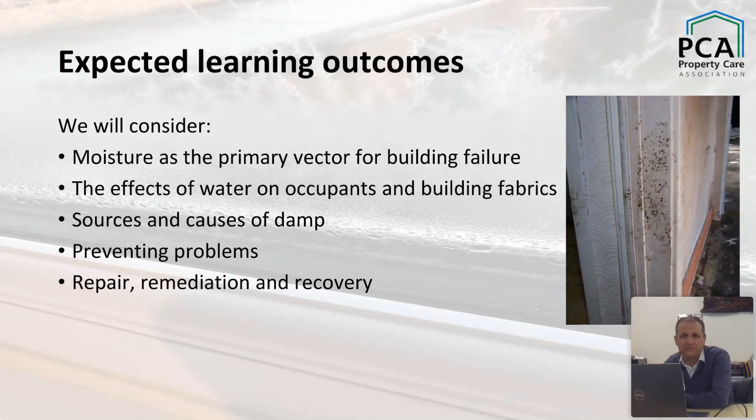We'll think about sources of moisture, preventing problems, and we'll look incredibly quickly at repair, remediation, and recovery. But we're not going to tell you how to do it, we're going to cover some of the very basic principles. So for those people who know something about dampness, the only thing that's in this presentation for you is a big lump of my photo library. I think there's some quite interesting pictures that keep you engaged, even if the content is quite simple.

So how do buildings fail? They fall down because the foundations aren't good enough. And that's something that has afflicted buildings since the day we started putting one brick or one piece of wood on top of another. We're not looking at that today.

Buildings get hit by things, whether that's the wind, the rain, impacts. We bash them, knock them, bump holes in them, and they fall down. But actually, the common thread with an awful lot of building failures, the vast majority, is the effects of water and the effects of free water, liquid water moving around. So that's what we're going to focus on.

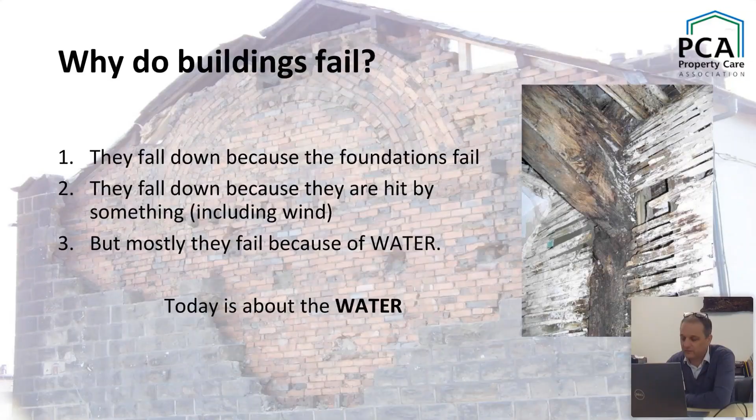So before we get into things, it's worthwhile thinking about what water facilitates, what water can lead to. It provides a mechanism where plants and animals can use building materials for food. Let's take wood for example. It's a great example. In its dry state, a piece of wood can last for an indefinite amount of time.

There's pieces of wood in service or kicking about right now that are many hundreds of years old, if not over 1,000 years old, that still work. It hasn't been eaten by anything, and it still has its structural integrity. Now that could be lost in a moment if that timber starts to get wet.

And as it gets wet, the animals and plants that can use the materials in that starchy material, in that starchy piece of timber, can start to move in and degrade it, biodegrade it, eat it. So that whole process of plants and animals living on building materials is quite important.

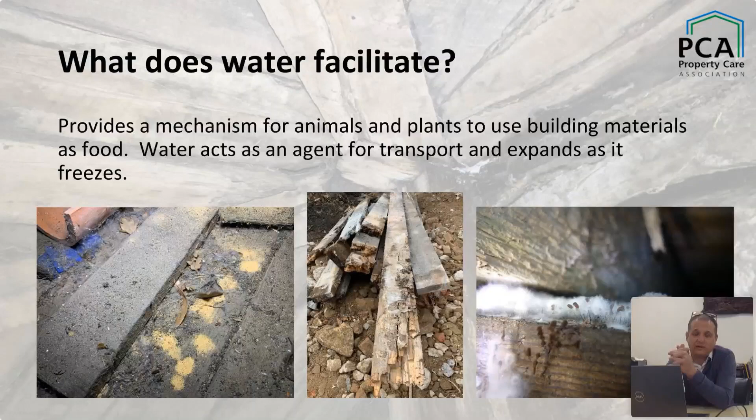But water also acts as a transport mechanism, and it also, unfortunately, has this horrible habit of when it freezes, it expands, and that breaks things down. So the bugs and fungus that find a way in and are early colonizers for damp construction materials are things like mites, molds, insects, beetles and fungi. We see those commonly all over the place. Some of them are inconsequential, but actually quite a lot of them, particularly when they're in our homes, do have consequences.

So the other thing we talked about is water being a mechanism for transportation. One of the things water does do when it's at any volume in construction materials or anything for that matter is it moves about. It wants to go from its source and diffuse through the construction materials. Anything that's porous, anything that has the ability for that to happen, it will move.

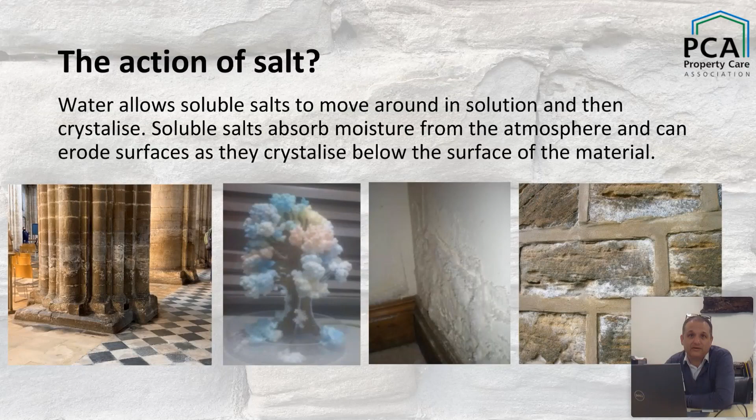What else does water facilitate? It corrodes stuff.

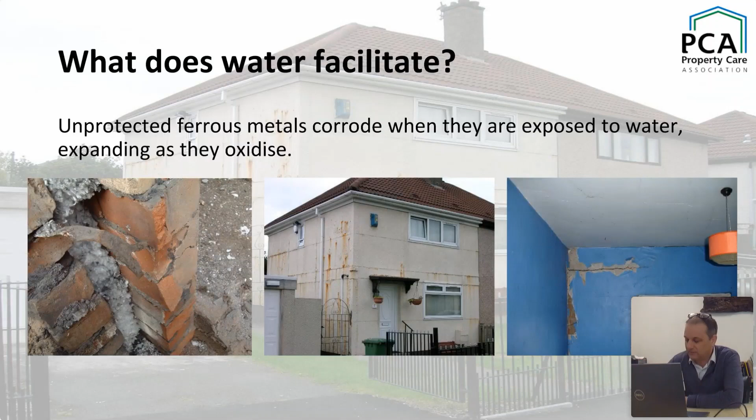We also mentioned very quickly that water freezes. Water is one of the only materials, as far as I'm aware, that as it turns from a liquid to a solid, it expands rather than contracts. That process can be incredibly damaging, both on a micro and a macro scale. Even smaller ice crystals that form in porous materials can blow the face off bricks. It can slowly start to erode or accelerate erosion. But it also does things like pull bridges apart and causes pipes to burst, and all that kind of stuff.

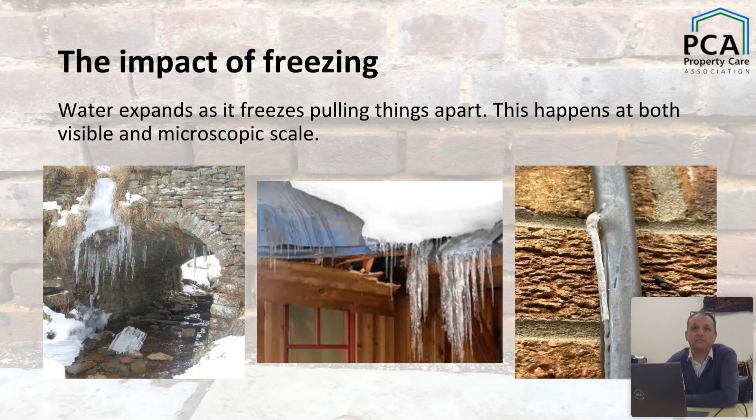So what does water damage look like? We're probably all familiar with the effects of water in construction materials. We have collapses, denaturing, swelling, warping, and delamination of materials. That's often caused where you have things like timber particle fibre boards that are in their dry state nice and solid, but if they get wet, they swell.

And once they've swollen, the materials that make it up have absorbed some water. It breaks the bonds between the elements that are glued together or held together. And when it dries, it doesn't go back. So those glue bonds, those bonds that are created in the manufacture, are broken. That's the same with things like plasterboards that just get wet and dry out - they generally don't go back to their original state. Laminates, chipboards, those sorts of things. There isn't necessarily any fungal action there. It's just the fact that the cells have absorbed water, swollen, broken the bonds, and it doesn't go back.

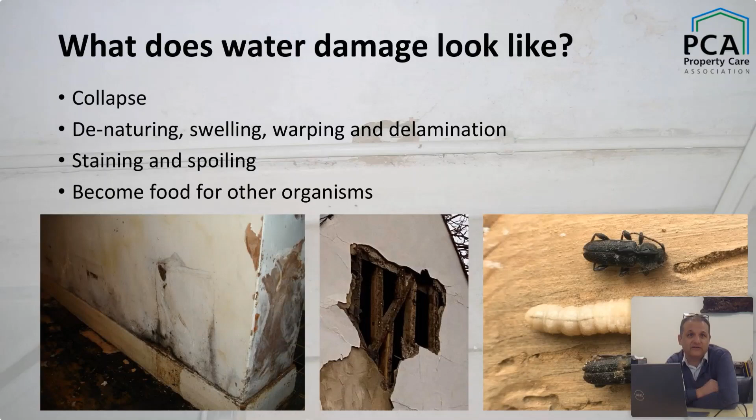You also get staining and spoiling, and that's part of that water movement, where it's dragging contamination and muck from wherever the source is through the materials and then depositing it on the surface. It can be quite difficult and tricky to deal with - you need to know what you're doing. And again, we have wood and other materials that become food for other organisms.

So where does the water come from? We're not going to look too hard at the whole range of things. We're going to stick with three main threads, if you like: groundwater, water penetration, and atmospheric moisture that leads to mould and condensation. Let's look at groundwater first - rising damp, penetrating damp below ground. It's where water rises through capillary action or moves horizontally and vertically as a result of hydrostatic pressure. It's very, very common.

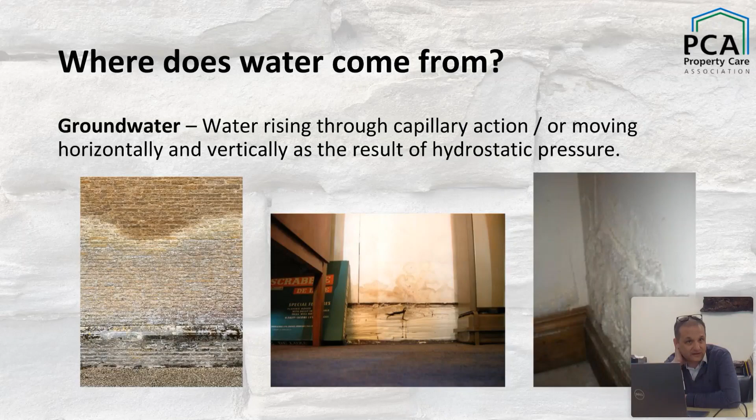So where does the water come from? When we're talking about rainwater, well, it comes from rain, and that's why I like to call it rainwater penetration and not penetrating damp or anything else when it's above ground, because it signals that it's come from the sky. The thing with rainwater penetration is it generally starts at the top of a structure where it gets in, and it works its way down.

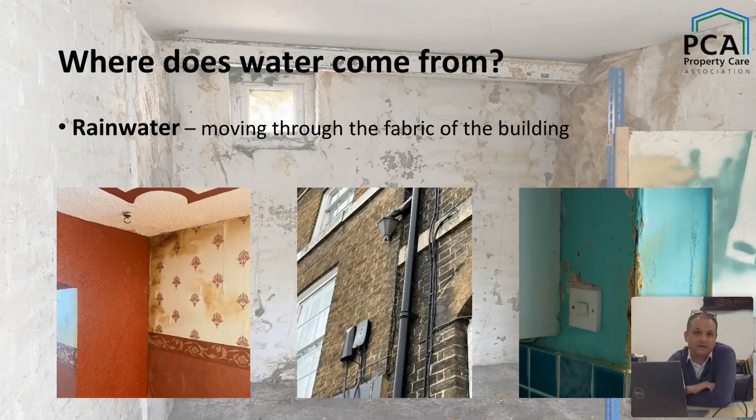If you think about how you might drop water into the centre of a sponge, you may well have a small point at the top where the water's being applied to that sponge, but by the time you get to the bottom of it, it goes down through the material like a cone. So often you'll find that relatively minor defects at high level will naturally lead to quite sizable amounts of moisture further down.

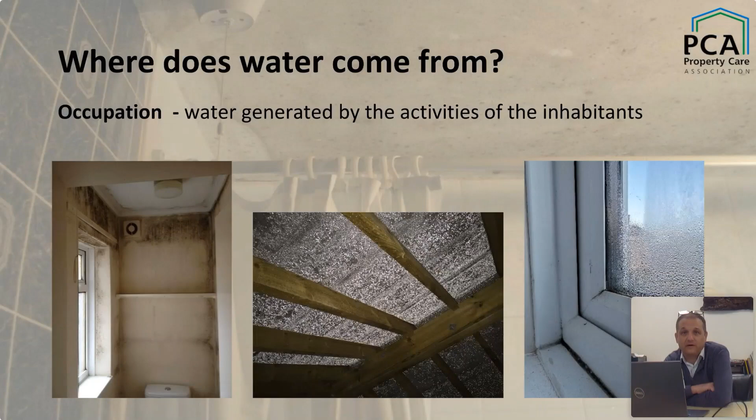Occupation. So condensation, moisture, if you like, moisture that leads to mould, and internal moisture imbalances - it is generally water generated by the activities of habitation. So it's the stuff that we do, and again we'll look at these things in slightly more detail in a minute.

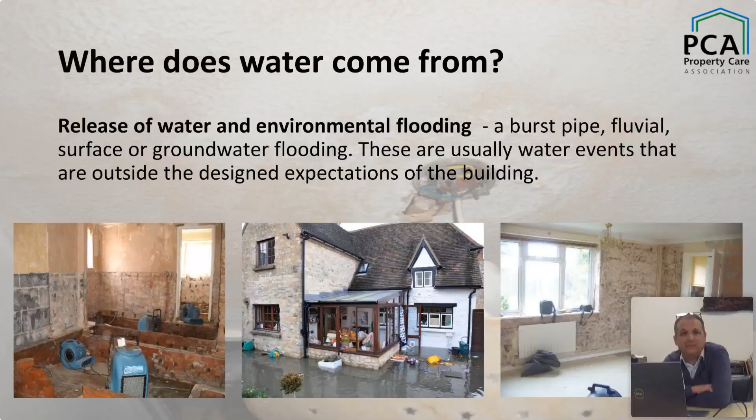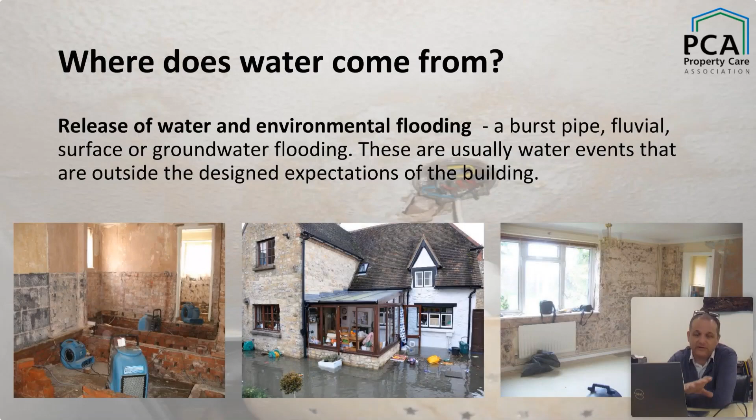I've also put in a slide about flooding. Flooding kind of sits aside from all of this, but you can think about it not just as fluvial river flooding or groundwater flooding, but actually in respect of releases of water from burst pipes and all that sort of stuff. But these are usually events that are outside the design expectations of a building. They're calamitous things, and they're dealt with probably slightly differently. However, the basic principles of recovery - drying out, understanding causes, redesign, etc. - stand scrutiny.

So let's think about groundwater and how and why that happens. To get groundwater to come up or through a wall, the soil conditions have to be such that water can be held there. You have to have precipitation, water coming into the ground from somewhere, or water from drainage or something else that's failing. But you have to have a loading of water in the ground. You also need a substrate - a wall or a floor or whatever it might be - that is susceptible to that. And let's be honest, most masonry structures are.

One of the ways that we can design against that is to build materials that don't have the ability to transfer water through them or up them. But actually, let's be honest, most construction materials that we've been using for the last few hundred years have a degree of porosity, and will allow water either to rise through them or be transported through them.

The other thing we can say is that both the height, when you're looking at rising damp, and the rate of movement into occupied spaces is dependent on the rate of evaporation. So if you have water evaporating at the base of a wall faster than it can rise, or you have sufficient height in the wall to prevent it continuing up, and your evaporation characteristics are correct, then that can have a significant effect on the height of rise or the rate of movement. The point being, though, that this is seasonal too, so it changes winter and summer.

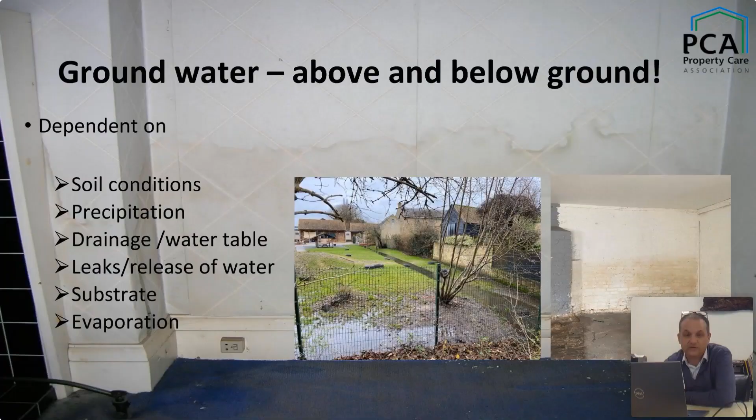So how do we control groundwater? In the simplest of terms, we either do nothing, because sometimes you don't need to - if building materials are not susceptible to groundwater rise, or you have no need to use or protect that space from water, there's nothing vulnerable, you can leave it alone. Another way, and a perfectly legitimate way of managing it, is to reduce the water in the soil, through drainage, or by moving the water away for some reason, or covering the ground. There are a number of ways to do it.

It can be incredibly expensive to try and do that in a retrospective way, and it also needs a lot of maintenance. The other way to control groundwater is to block it, and there's a whole world of ways in which we control water, either penetration or rise, through blocking it.

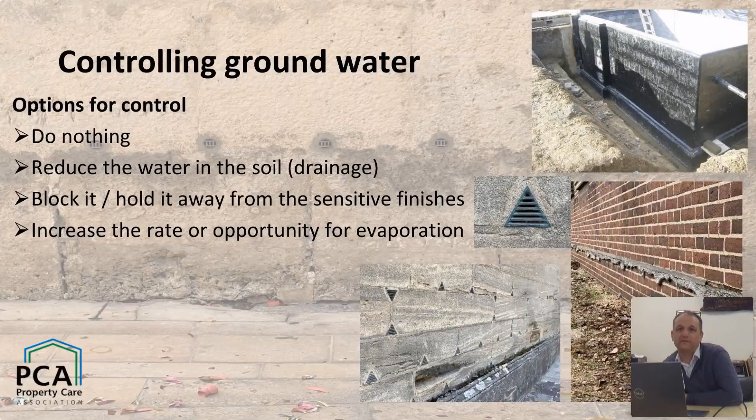But the other photographs are probably another way that is used to try and control water. I don't have very much truck with it, but that's a form of siphon system. That photograph was taken in France - they are brass fittings stuck in triangular holes in an attempt to try and increase the rate of evaporation and keep the building dry. I don't have very much truck with those sorts of systems - they don't kind of work for very long. However, they have been very popular in Europe, and there are outlets in the UK, of course. But yeah, not one for me, I'm afraid.

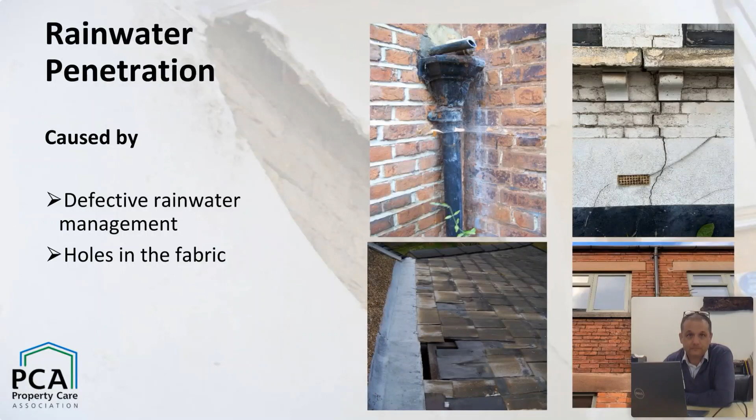We've also got issues with porosity. Building materials that have high rates of porosity, so they can take on water very readily, usually rely on high rates of evaporation to be able to work in balance, so they don't wet down. However, in some circumstances, materials are too porous and their moisture exposure is too great, and you get an imbalance.

Water gets into the structure in greater volumes than can evaporate out during periods of drying. This can be affected by coatings, changes of exposure, and cavity wall insulation. All sorts of interventions can tip a balance. So porosity is something that's really important to think about if you've got water penetration problems. Things like through stones and solid walls can encourage it, and poor design. The photographs on the right-hand side, yes, they are holes in the building or rainwater issues, but they are inherently bad design and prone to failure.

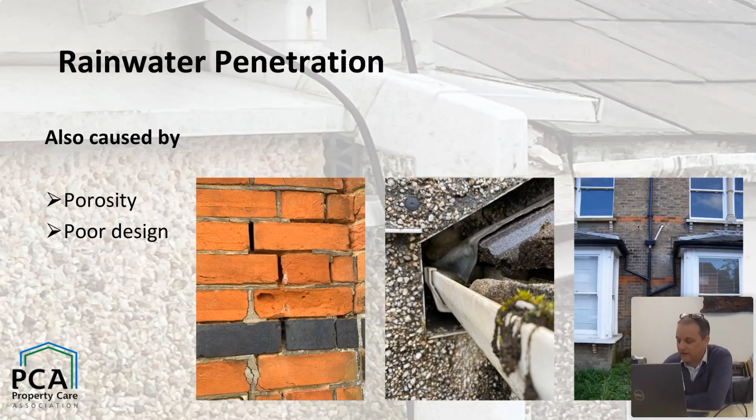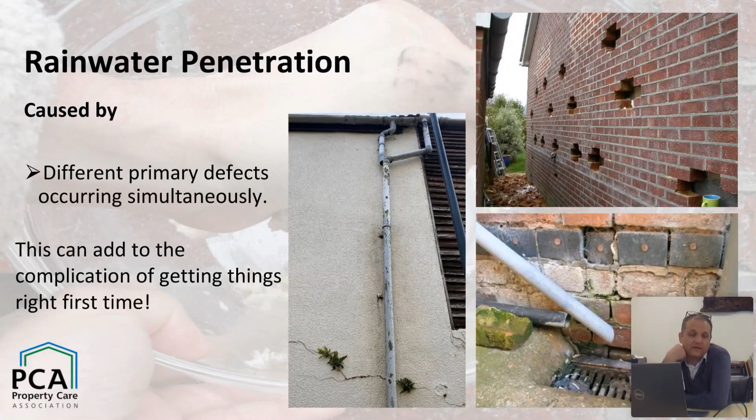The one thing about water penetration and rainwater is that lots of things can be happening at the same time. The photograph there, the long photograph, shows a downpipe that's broken, but we've also got a crack in the external coatings. So which is the major problem? Well, they both work together, and as the water goes into that crack and the plants grow inside, the crack opens, the rate of water ingress increases, and so the problems go through like that.

You then add to the complication of that particular issue that external coatings are reducing evaporation enormously, and actually the water's got nowhere to go but in. So this is where the subject, and this is where your diagnostic process gets a little bit more complicated.

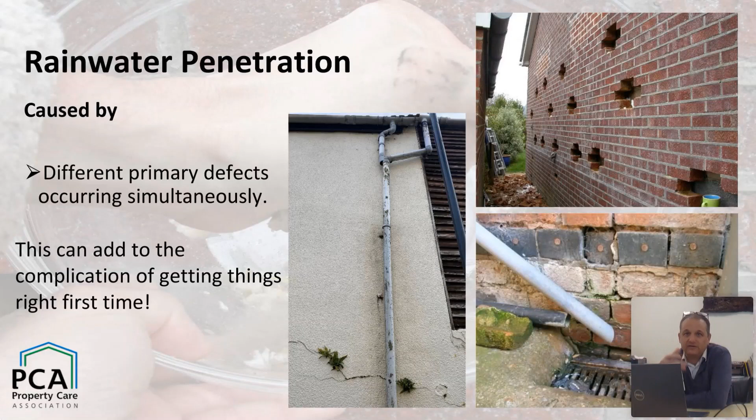The job on the right hand side looks like a cavity wall tie job. It's not. It's the removal of cavity wall insulation, and that again is an issue of both poor design, porosity, bad product selection, etc. Where you've got water penetration that probably would not have been a problem when the cavities were clear, but the cavities get blocked and you've got a vector for transfer, etc., and the balance breaks down. So you've got to think logically about these things.

So preventing rainwater penetration, these again are very, very simple things in many regards. So we have to think about planned maintenance. Planned maintenance is absolutely something, as far as I'm concerned, is a must for every householder, every organisation, every property management company. Something I learned at building college when I was 17 years old is planning and undertaking maintenance regimes is a massive way of avoiding problems. But unfortunately, we're not wired that way, and we wouldn't have the industry around preservation that we had if everybody looked after their buildings perfectly.

Improving design, absolutely. Making sure we have compatible materials that can manage their exposure characteristics. And I think personally as well, we also have to understand human nature and how things age, because people don't maintain their buildings well, people don't understand the issues of compatibility, people don't always report damage or deal with damage when it first occurs. So actually, using very friable materials where we know people are going to have high impact damage, or high traffic, is an area where failure can occur.

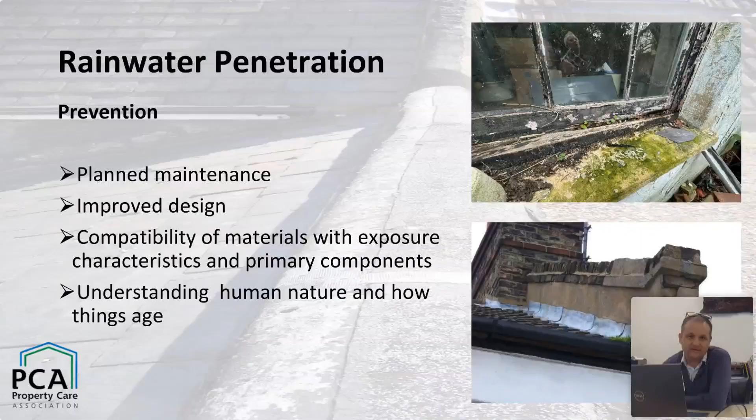So how do we recover from issues of rainwater penetration? I think that when surveyors are involved with this, one of the important things is to really understand the mode of failure. So you don't just deal with the damp problem, understand where the water's come from, fix that, make sure that is rectified in a way that you can reduce future points of ingress or future failure, and then you dry the building, then you repair the building, and you improve the design if you possibly can.

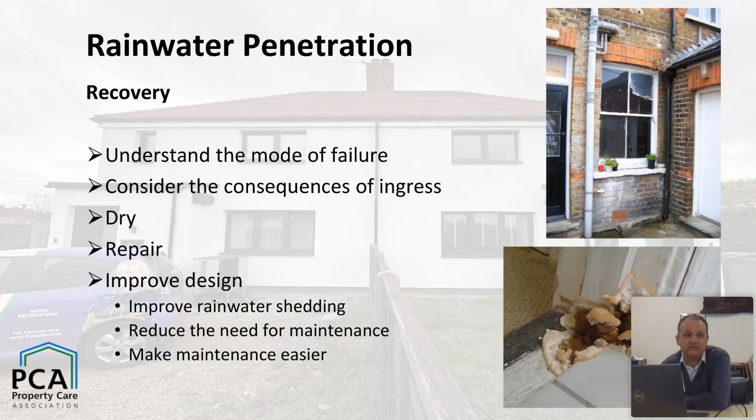As you move forward, let's talk about atmospheric moisture, occupation water, whatever you want to call it, that leads to condensation, high humidity, and therefore mould. It is almost without doubt the most common form of problematic water in buildings. For every real problem building where somebody's got mold growth that is affecting them either physically, mentally, or damaging construction materials,

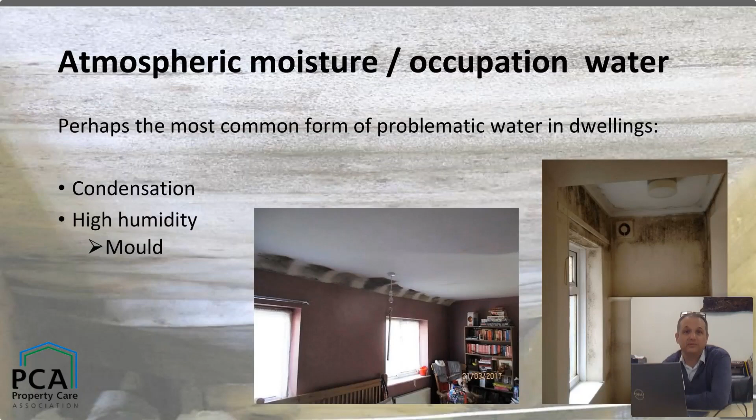there's probably another 4 or 5 out there where we've got small levels of underlying mold growth that actually probably don't cause us any problems, can be wiped away or managed in a very relaxed sort of way, comes and goes simply because it gets cold outside, and we've got a shower that kind of works over time without the fans to suck all the water out. A bit like my house, really. We've got a little bit of damp this year, a bit of condensation and mould this year. It doesn't really bother me, and I keep wiping it away.

It's not going to cause anybody, apart from my partners, any grief at all. So where does this occupation water come from? I think probably most of us understand this.

It's mostly from us - nearly all of the imbalanced water comes from us. It comes from breathing and respiration, from drying and evaporation. So not just clothes, but taking a coat off when it's been wet outside and hanging it on a hook. It comes from cooking, from fish tanks, from our pets. It may come from leaks if that moisture is being released into the air, but not very much.

I've also put down that it comes from burning fossil fuels - burning gas, burning wood also liberates water, but most of the time, if that's done responsibly, it's flued out. When you're burning timber or coal in a log burner, it needs oxygen for combustion, so it drags moisture out of the air and gets rid of it. A lot of the time these things don't add to the moisture loading, but reduce it. The exception is bottle gas heaters that aren't externally flued, but those are very uncommon these days - something we used to see a lot in the 80s and 90s, but not so much now in 2023.

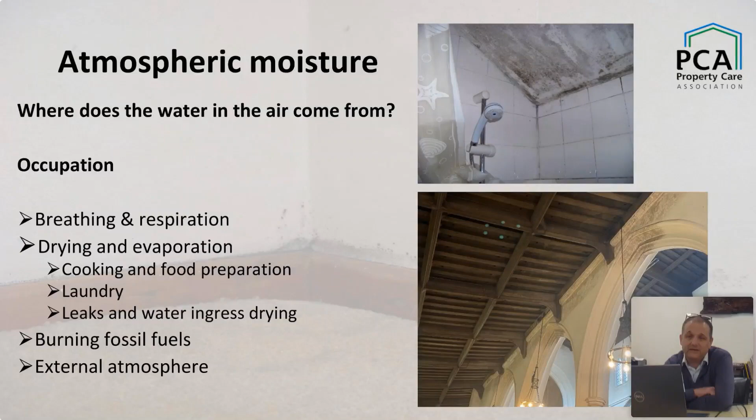So it's worth mentioning that there are often two types of condensation described. It's the same process, the same water, but we have surface condensation - water that occurs on the surface of a material - and interstitial condensation, which describes water that is deposited inside the body of a piece of material, or sometimes relates to condensation that occurs within the layers of a piece of construction. So within a roof, for example, or within a wall, not necessarily inside the block, but in a void inside that element of construction.

So condensation simply describes the change of state of water from a gas to a liquid. Condensation is that moment when the water changes from a gas to a liquid because the air can't hold it any longer. Really, to understand humidity - the RH thing that I'm sure everybody's heard of - understanding the capacity for air to hold water is probably the key to understanding humidity.

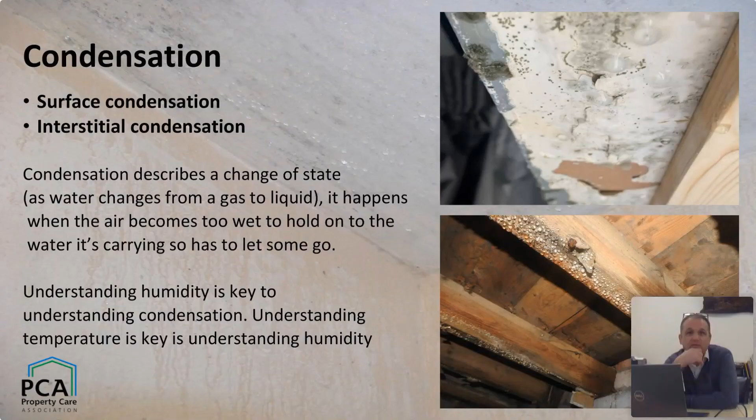We'll go on to that now, but let's think about mold for a moment. What is mold? Mold is this consequence of high humidity and high water content. Most molds in homes like to be neither too hot nor too cold, nor too wet nor too dry - a bit like the conditions that we prefer. They like that balance. Mold will grow in relatively cold conditions where it's nice and moist, but more slowly, and it will grow in relatively drier conditions, but it has to be nice and warm. There is a balance - like most things, it has a preferred range of growth.

In the right conditions, mold will grow relatively quickly. In suboptimal conditions, it can still grow, but much more slowly. One thing I haven't got a slide on: nobody that I know can tell what mold is just by looking. Black mold is black mold - yellow mold and blue mold are just describers of what you see on the day. That does not necessarily describe the genus, species, or type of mold you have. Anybody who says this is aspergillus, or penicillium, or whatever it is, unless they've taken samples to a lab, is guessing - absolutely guessing. But for me, it really doesn't matter. The fact that you have mold growth present is an indication of imbalance. It shows you have the conditions correct for mold growth, and therefore there is an issue that needs to be investigated. The type of mold is far less important than its presence.

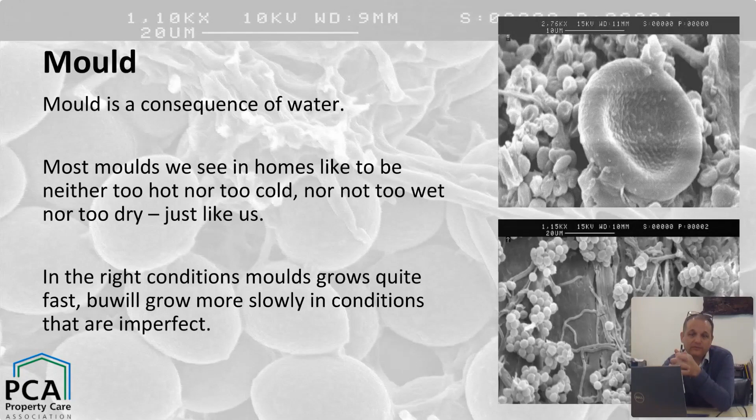I'm not quite sure why it did that, but it was very interesting to take. I can't quite understand the conditions required for that to happen, but there you go. We see mold often growing on glass and plastics and all sorts of stuff. It's clearly not feeding off the glass or plastic, but it can survive on very, very small particles of detritus, human skin residue, dust, whatever. It doesn't need much, but what it does need is some water and some food.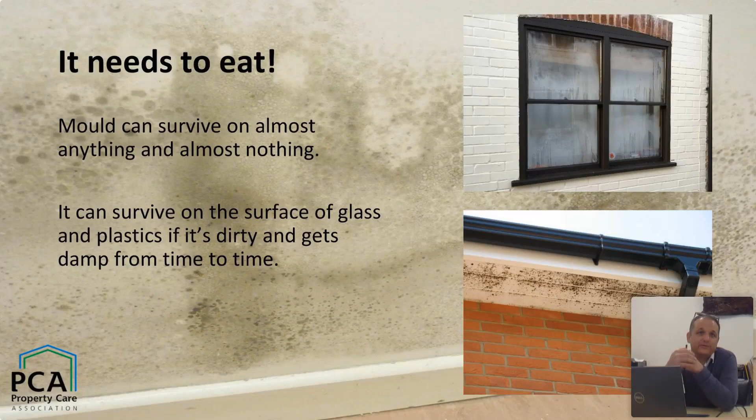Depriving it of either is the way to go. So in theory, killing mold where it's growing is very easy. You either dry it out and desiccate it, which stops it from growing, and you achieve that by ventilation, reducing moisture production in the building by controlling how much moisture goes into the air. You insulate the structure and heat it, and that process of drying out and changing the conditions to reduce the opportunity for mold to grow is in many respects the best long-term solution, really the only long-term solution.

I've kind of flippantly put it as starve it to death or poison it. Starving it to death and poisoning it really kind of describes cleaning. If you can wash it off, you can clean surfaces so they're spotlessly clean. If you can deprive the mold of what it needs to survive by way of food, then you can also kill it that way. Much more difficult, because it doesn't need much.

But the use of anti-fungicidal paints and washes and wipes and all of that sort of stuff is highly effective in the short term. Can provide solutions that can get you out of trouble, if you like. But the fact of the matter is, for the long term, changing the conditions to prevent growth is much better than continuous cleaning or cycles of trying to either poison it or wipe it away.

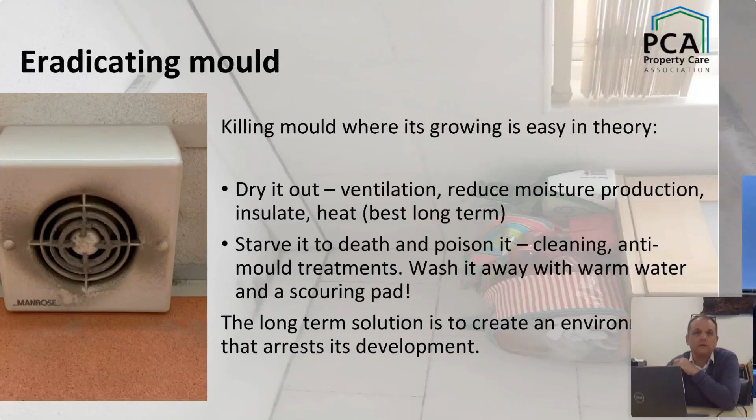So I'm going to try something new. I don't know whether this will work, but I'm going to try. You may have seen on other presentations the use of buckets and balloons and other things to describe relative humidity and moisture loadings. Well, that's probably something that will take a little bit more description, and I'm not going to do that today.

But what I thought I'd do is just look at what moisture meters tell us and what they actually mean. So indulge me, and criticize me if I get this wrong. It may go terribly topsy-turvy, but let's see if we can actually understand what our moisture meters and these pieces of equipment that many of us carry are actually telling us. These were taken last week, last Friday in fact, and I hope that working through what this lot of stuff means might be valuable.

So this is outside, last Friday, mid-morning. It was 7 degrees outside, and you can see there's a bit of fluctuation on the temperature - that's the figure in the bottom right-hand corner of the screen. It shows we've got about 7 degrees centigrade outside, and that is giving us a relative humidity of 64.6% RH. That means the air is holding 64.6% of its capacity of water at that temperature.

So what's left is about 35% of space left for water to go into the air. Now, what that is also showing us is that we've got 4 grams per kilogram of water inside the air - so 4 grams of water in a kilogram of air. That's a relatively small amount of water, perfectly normal for a winter's day in January. A little bit of water, but it's exerting a pressure on the air because the water vapor exerts a pressure of 0.7 kilopascals. When you consider that 1 kilopascal is kind of the normal range for outside, 0.7 means we've got a day with low pressure.

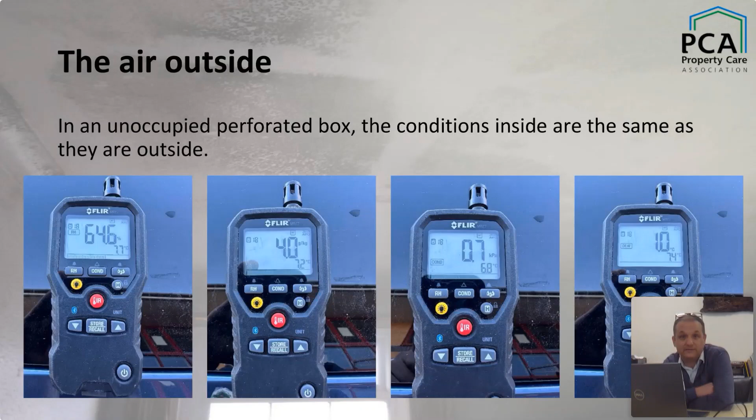And the dew point that comes from the calculation the machine does on all of that is 1 degree. So that means if the temperature drops from 7.4 degrees to 1 degree C, then you will have 100% relative humidity and water will be liberated from the air. So let's just move on and see what it's like inside.

Same day, same meter, just moved from outside onto the table of my office. So at that point, what does that tell us? I hope people will look at those readings and say that looks like a healthy space to be. Well, it is.

48.5%, 19 degrees centigrade. So it's not particularly warm, but it's certainly not cold. We've got a relative humidity of 48%. So that is basically only 50% of the air's capacity to carry water. We've got 6.7 grams of water per kilogram of air, or 6.7 grams of water in a kilogram of air. Again, not too bad, absolutely fine.

And we've got 1.1 - the vapor pressure is 1.1 kilopascals. So we've now got to a point where that water is exerting some pressure in the air. We've seen that go up by 0.4 of a kilopascal. So that's quite significant, but that's absolutely fine for an occupied space. That's considered to be a dry and very healthy environment.

And the dew point is 7.9. So if we've got an air temperature of 19 and a dew point of 7.9, that's the point at which the relative humidity would hit 100%. We'd get water being liberated. That's really pretty healthy place to be, and it's very unlikely that you'd get condensation.

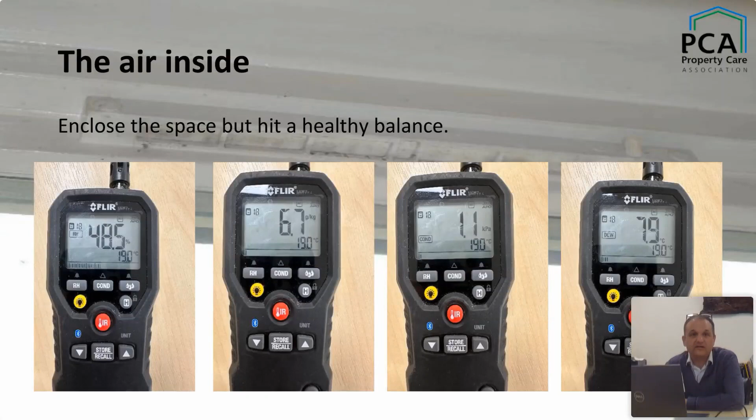So let's look at the final one, which took some preparation. I had to boil a kettle in a very small room, but now we've got an incredibly wet environment. Now we've got 14 grams of water in the air, at 94% relative humidity, with 2.3 kilopascals of pressure. That's a really unhealthy room.

But what we can derive from that is that we've got a room where we've got lots of water, a lot of water that wants to get out, because where you've got pressure, and that's the kilopascal reading, we've got 0.7 outside and 2.3 in that room. So that water wants to get out. It wants to leave that building. It wants to equalize - if the pressures want to equalize. So you've got a mechanism there for transport.

And you've also got, when you look at the dew point characteristics, a temperature of 20.5, but a dew point of 19.6. It is very, very likely, almost certain, that the envelope of the building containing that air is going to be at or below that dew point, because that's the nature of boxes. If you've got a colder environment outside, a warmer environment inside, the box that separates the two is bound to be colder.

So I don't know whether that's worked, but really what I wanted to explain is that the instruments many of us have are very, very good. They help us enormously, and getting to understand what they mean and the context and how to use them is incredibly important. That's one of the things we major on in the PCA. They're very poor tools in the wrong hands, but if you understand them, they can be incredibly powerful.

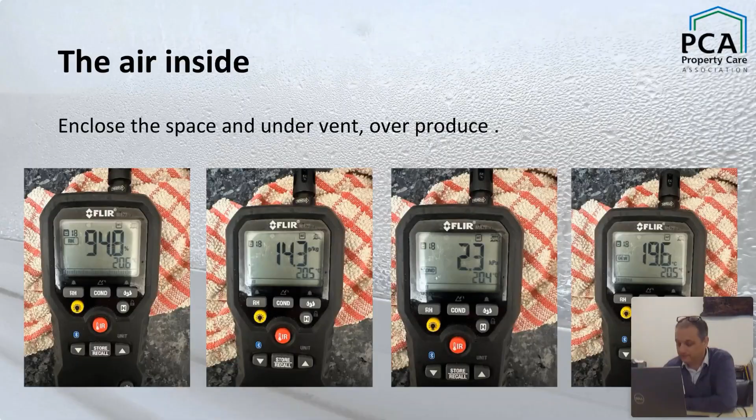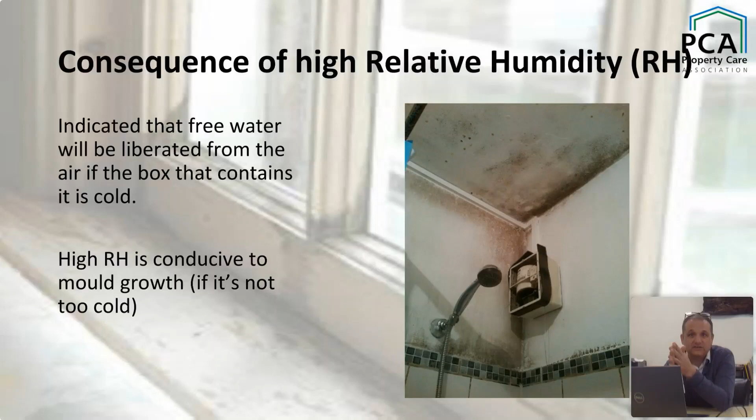So the consequences of high relative humidity - high RH indicates that free water will be liberated if the fabric of the box is not working well. So if you get cold walls, cold floors, high relative humidity, it's very likely that you'll get condensate. When you've got very high humidity and high temperatures, then you've got perfect conditions for mold growth, even if you don't reach the RH where you get free water liberated as drops of water on the wall. If you get to 60, 70, 80% RH and you have static state conditions for any period of time, you are highly likely to get mold growth.

What's the consequences of having a lot of water? We're talking about the total moisture content of the air. This indicates that you've got high production - water getting into the air and staying in the air. It will have a direct relation to vapor pressure, and it shows in many respects that you've got high production and probably poor ventilation.

What I would say is that you have to separate to some degree the issue of relative humidity and grams per kilogram, because grams per kilogram does not consider temperature, whereas RH is absolutely temperature dependent.

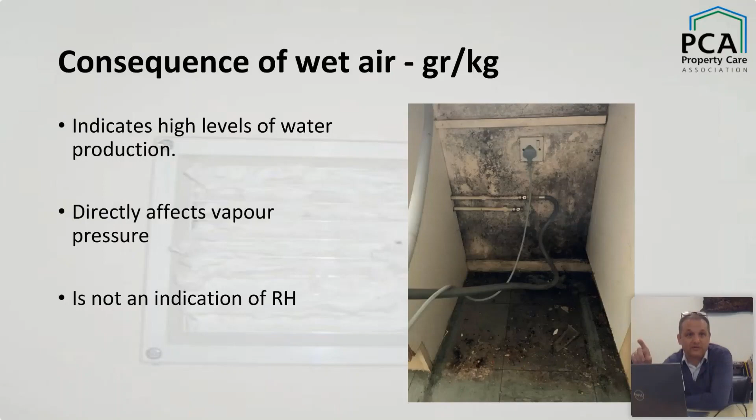So the consequences of high vapor pressure is that it's the transport mechanism to move water in the air around a building, and it can also be used to get rid of it too. That's what trickle vents do - they give an opportunity for a building to expel water in a relatively controlled way. Most buildings leak, lots of buildings leak very badly. And what happens if you have a buildup of vapor pressure?

That vapor pressure will leak out of those cracks and crevices. In a building that's been retrofitted or works as a high performance building, high vapor pressures can be really problematic if you don't have continuity of vapor checks and all that kind of stuff. I find myself disappearing off down a blind alley when I start talking about this if I'm not careful. But yes, vapor pressure is important as a mechanism for transport.

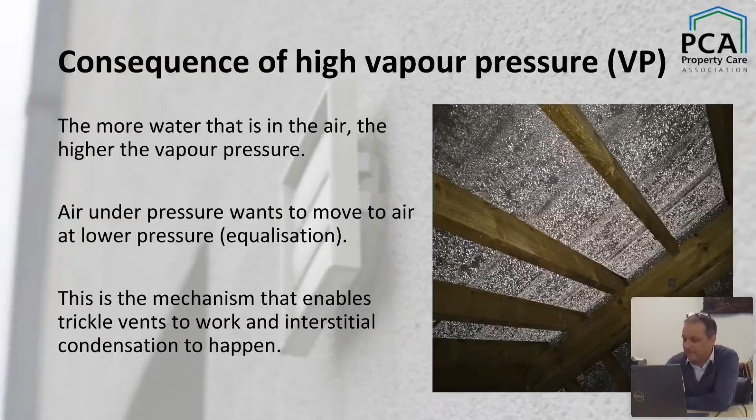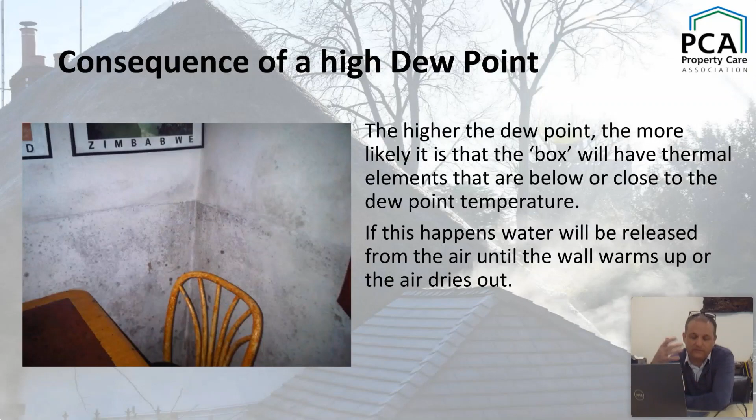So how do you tackle moisture and atmospheric imbalance? Moisture production, if you can reduce it at all. Ventilation, of course, but you need to balance ventilation. Ventilation should be adequate - we shouldn't over ventilate because that strips heat out of the building, and that brings us on to energy inputs. Buildings have to be kept warm, unfortunately. We have to do as much as we can to keep them in balance, and that includes burning energy, inputting energy to keep the place warm.

So we don't contradict everything we're trying to do with ventilation and energy inputs, the building should be thermally efficient, or as thermally efficient as we can make it. We don't want cold spots, we don't want thermal bypasses, and we don't want elements of the building envelope that can't manage and can't retain the heat.

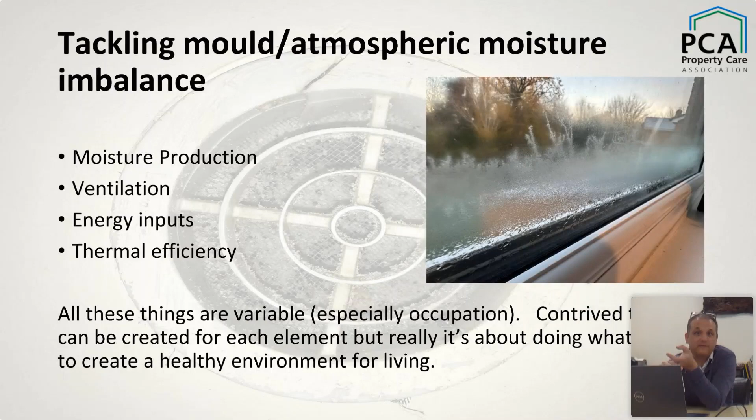It might relate to thermal performance, the type of heating, the type of ventilation, and all of those things. Some are cultural and relate to the way people occupy buildings and use them, and some, of course, are economic. If people just don't have the money to heat a building, there's nothing you can do to overcome that.

So apart from making the energy cheaper or giving people money to heat their building - and that was one of my frustrations going back many years - I considered that a lot of the problems I was seeing, particularly in private domestic rented properties and also in social housing, was actually the result of poverty rather than anything wrong with the building.

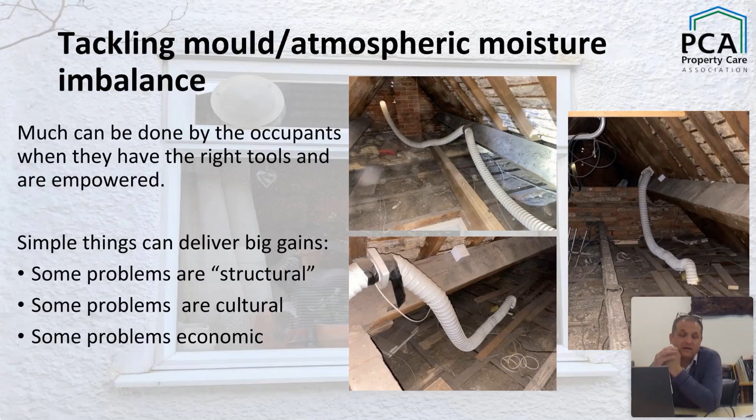I'm kind of winding things up, and I've got to be careful not to be too much on a hobby horse, but that statement I think holds true. I don't think I've ever met anybody who wanted to grow mold on their walls, and I don't believe that blaming occupants out of hand for the problems they're living with is a healthy or reasonable thing to do.

There are situations where property owners, tenants, occupants don't make their lives any easier, and there are tenants that are scurrilous and trying to get a new house or something. But I find those people are very few and far between, and most problems they are living with are very difficult and troublesome for them, particularly as there's all sorts of other issues going on. But despite the fact that disputes are common, I absolutely believe that the technology, the knowledge and the experts exist. If the will is there and the cash to actually make a change to the construction, I believe most issues can be resolved.

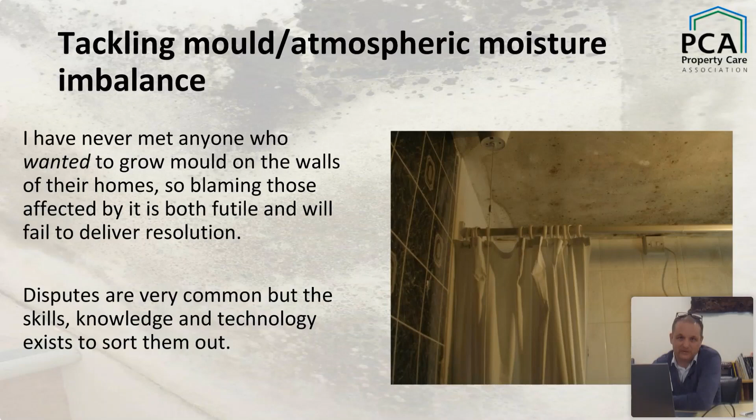It's been an incredibly quick rattle through stuff. I hope there's been something in there that has either entertained or caught your imagination. I really don't mind if people want to grumble and give me a hard time about what's up there - I think the debate is always very welcome and very worthwhile.

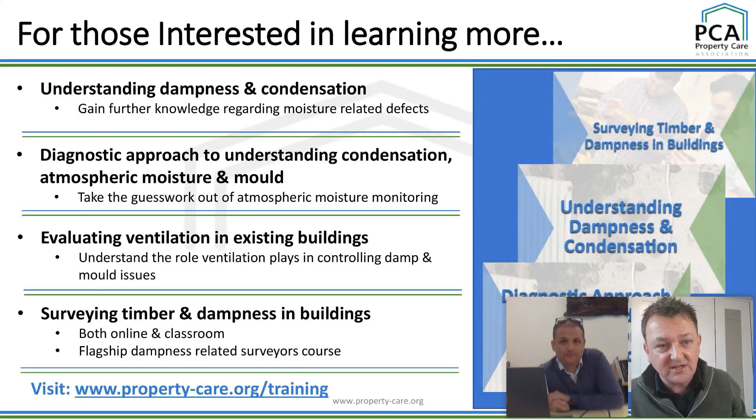These are... Andy, let me butt in just right now. You know, all of that's great, but the PCA can't actually go out on site and help you. We have a huge reservoir of members with incredible levels of knowledge, insight and experience, and they must be the primary resource for people struggling with dampness and mold problems in their homes.